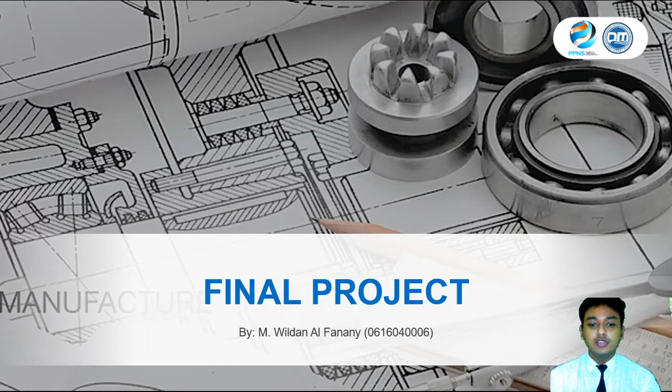Let's start the main topic: design and manufacture of turning attachment for duplicate turning process on conventional lathe machine, with my supporting lecturers, Bayu Wiro Karuniawan, STMT, and Dika Aditya Purnomo, SST, MT.

The background: Indonesia is one of the big countries with a big role in the manufacturing industry. On a national scale, the sector contributes to an increase in economy by 20.27%, by shifting the role from commodity-based to manufacturing-based, making Indonesia the biggest manufacturing base in Southeast Asia. In global manufacturing, Indonesia stands in 9th position among all nations in the world. The potential of manufacturing sector growth in Indonesia forces companies to be more productive.

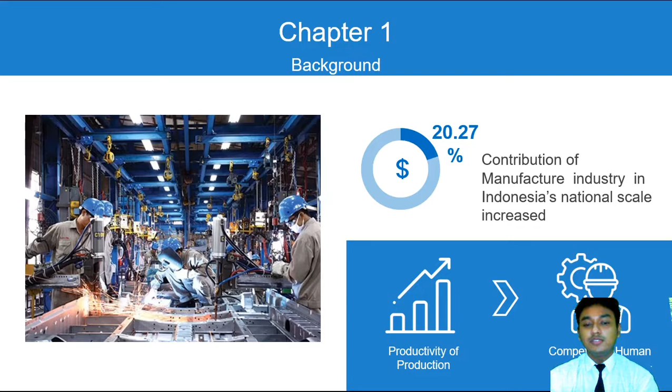One effort to increase productivity is skilled and competent manpower. Higher education institutions have an important role in creating skilled and competent human resources. Polytechnic of Shipbuilding Surabaya is an institution oriented on vocational study, committed to creating skilled and competent human resources, especially in the maritime industry and other industrial sectors.

To comply with Permenristek Dikti number 44, year 2015, about National Higher Education Standards, PPNS began to apply the teaching factory learning model. Teaching factory implements the real standards of the industrial sector to build the skill of human resources, and is expected to cooperate with industry to make commercial products.

PPNS workshop provides production facilities such as CNC lathes and conventional lathes. Conventional lathes have a lot of weaknesses compared to CNC lathes. Because of these weaknesses, the conventional lathe needs an improvement to be able to duplicate workpieces by adding an attachment to the tool post of the conventional lathe.

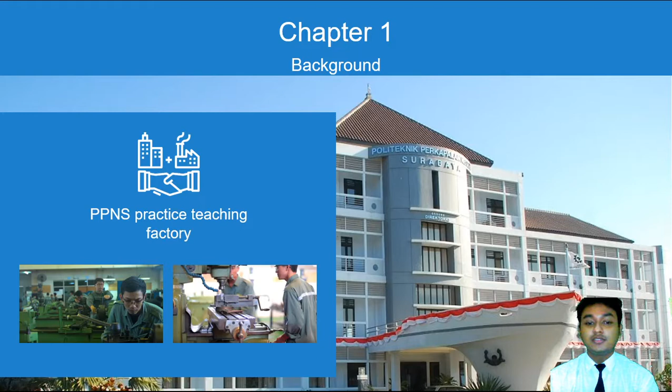From these problems, the writer made this a research topic for the final project, titled design of turning attachment for duplicating process on conventional lathes.

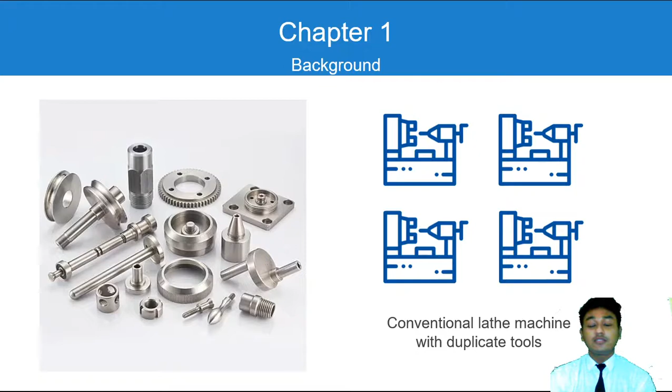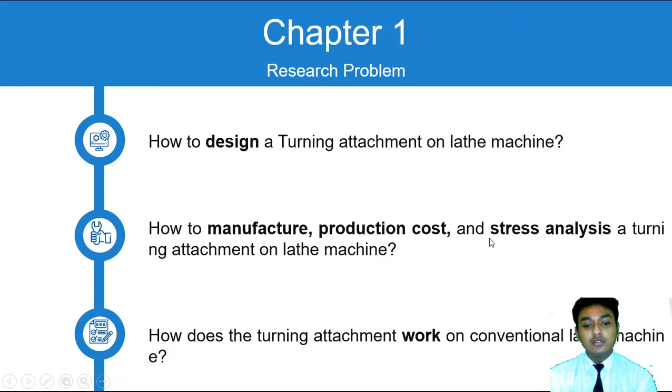Moving to the next slide, these are the research problems: how to design a turning attachment on a lathe machine, how to manufacture it, the production cost, stress analysis of the turning attachment, and how the turning attachment works on a conventional lathe machine.

The turning attachment should be mounted on a conventional lathe with brand Harrison M250, the small lathe that PPNS has. The turning attachment does not pay attention to the surface roughness of the workpiece. The maximum workpiece length is below 50 mm, and the maximum workpiece diameter is 35 mm.

Welding strength and bolt strength are considered for safety. The material used for trial testing is aluminum with HSS tools. The measurement of force using dynamometers is not discussed, and optimization of machine parameters is not discussed.

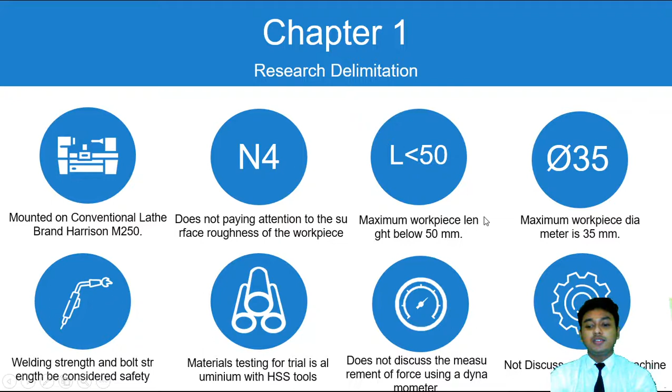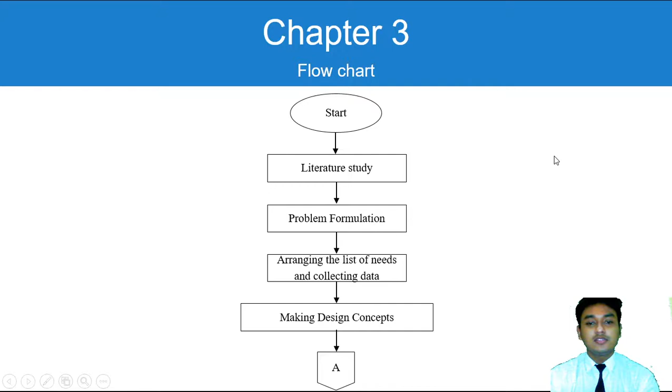This is the flowchart, using the Ulrich method for this research, by making 3 design concepts, filtering them, and trialing them.

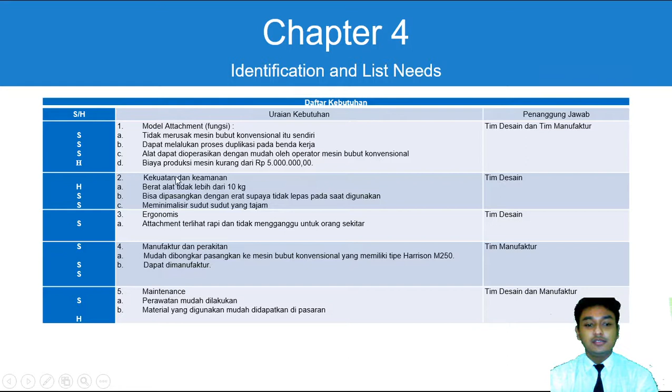This is the identification of list and needs for this model: strength, ergonomics, manufacture and assembly, and maintenance.

This is chapter 4, design concept. The first design concept is a turning attachment with a top plate with an inside spring, using pull springs.

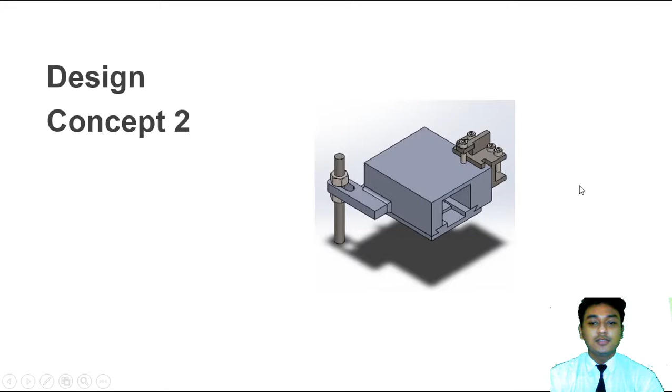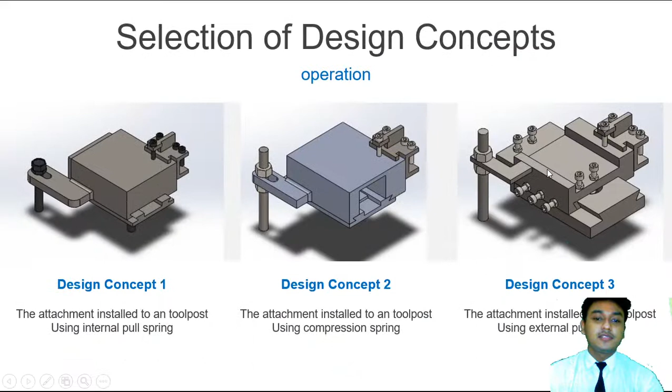Design concept 2 uses compression springs placed inside, and design concept 3 uses a pull spring placed outside. This is the section of the design concept in operation. The three design concepts work the same way, and this is the geometry.

Design concept 1 has a length of 155 millimeters, width of 135, height of 60 millimeters, and weight of 2.47 kilograms. Design concept 2 has a length of 130 millimeters, width of 125, height of 65 millimeters, and weight of 2.31 kilograms.

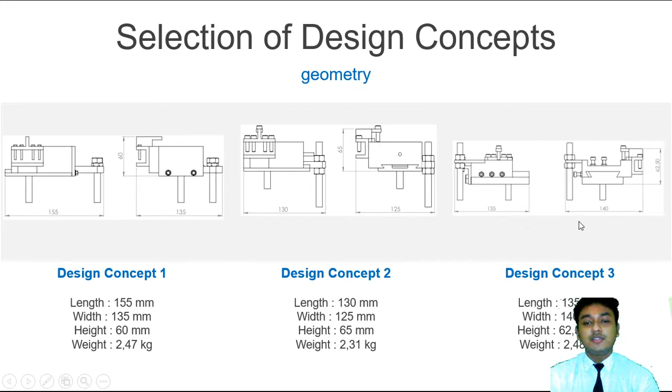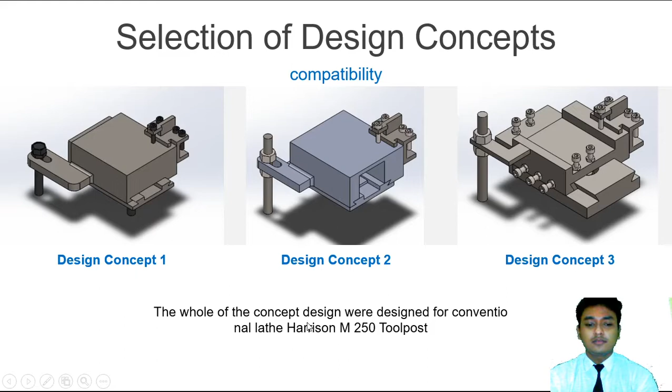Design concept 3 has a length of 135 millimeters, width of 140, height of 62.5 millimeters, and weight of 2.48 kilograms, the biggest of the three. The compatibility of the three design concepts is the same overall, since we made them for the conventional lathe Harrison M250 toolpost.

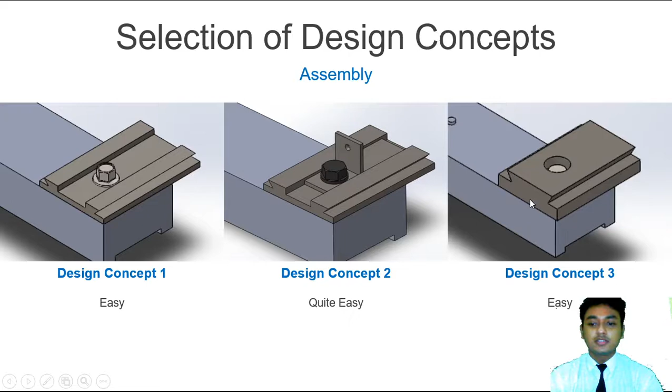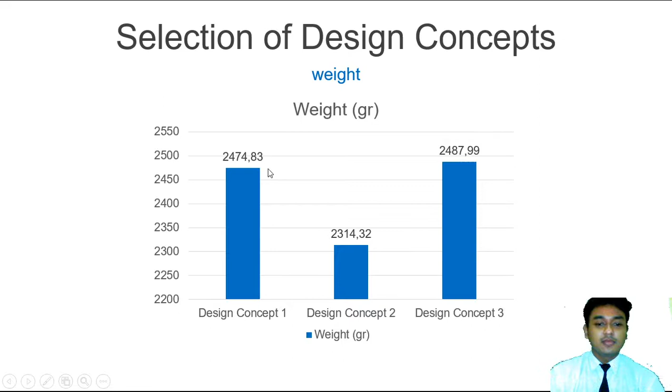And this is the weight of the 3 design concepts. Design concept 3 has more weight with 2,487.99 grams, and the lightest one is design concept 2.

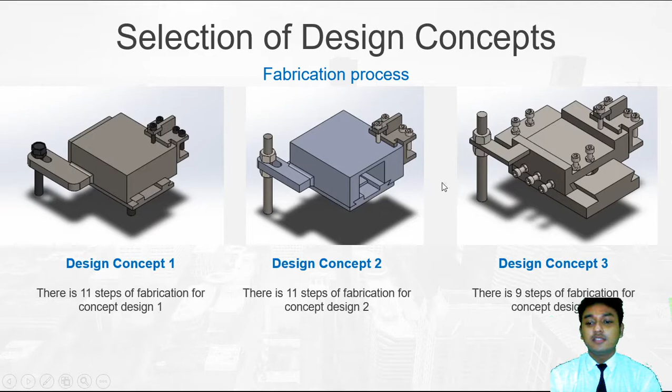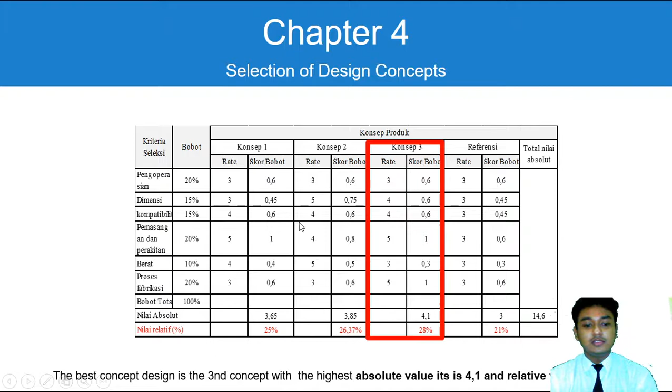The fabrication process: design concept 1 and design concept 2 have the same steps of fabrication with 11 steps, but design concept 3 just needs 9 steps, making it easier. This is the point of selection for the design concept, and concept 3 is chosen because it has the highest absolute value of 4.1 and relative value of 28%.

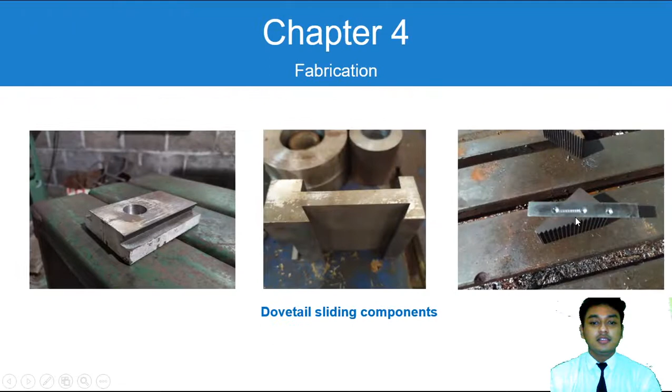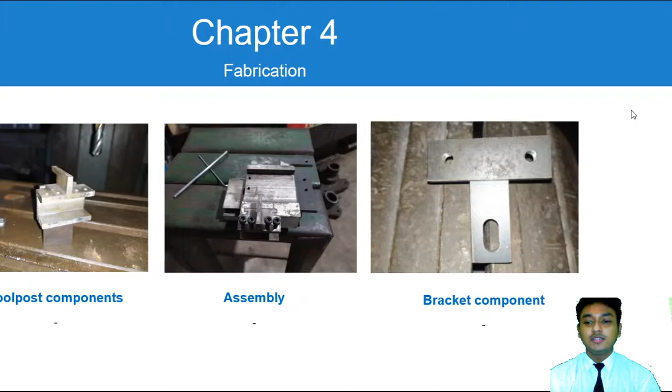And then we move on to the cost. The total cost of producing the turning attachment is 3,144,000 rupiah.

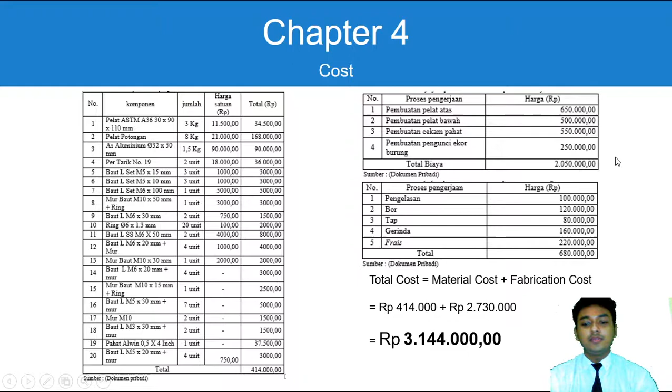And this is the mechanism. You can see there are 2 springs attached on top of the upper plate. This makes the imitator always stay on the path. So if the toolpost is moved to the right or left, the upper plate will move forwards and backwards according to the mold, because the imitator will keep going along this contour.

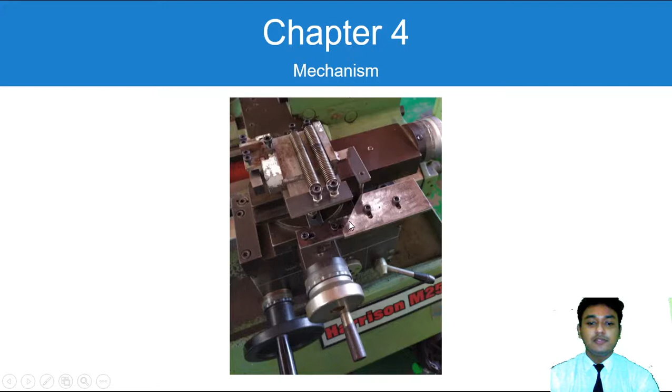Then this is a video of the assembly mechanism. You can see the mechanism a little bit at the end of the video because I made it time lapse. So we start to see this.

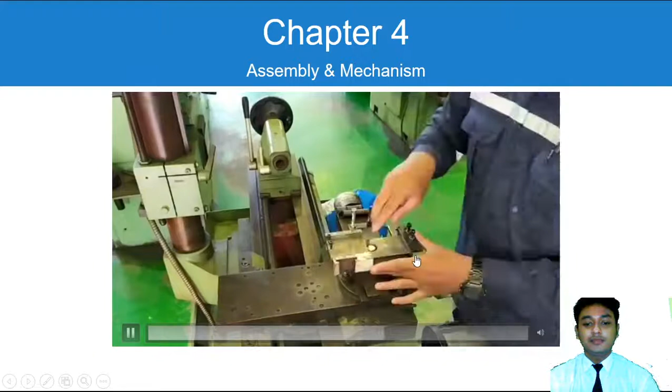The original toolpost of the turning attachment should be detached and replaced by the turning attachment. This is the mechanism, you can see that. Okay.

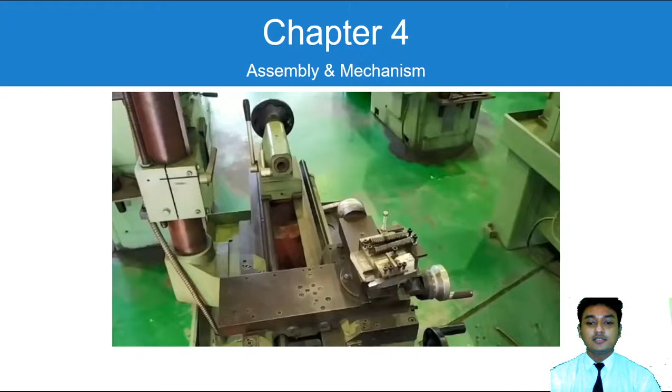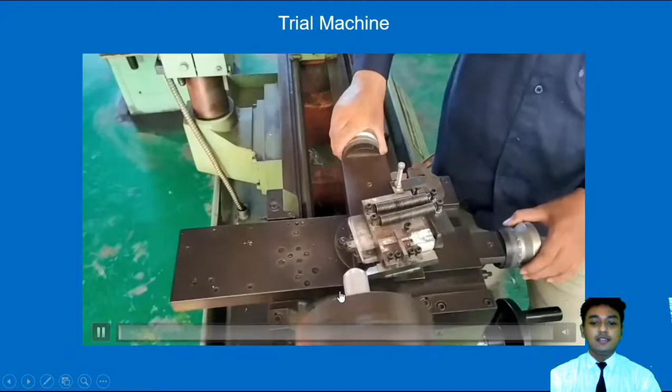And then this is the trial process. The material used is aluminum with a diameter of 31.61 millimeters, and the tool is HSS.

The process takes a full amount of time, so I sped it up, but we cut it because the limitation of time for the presentation is 15 minutes.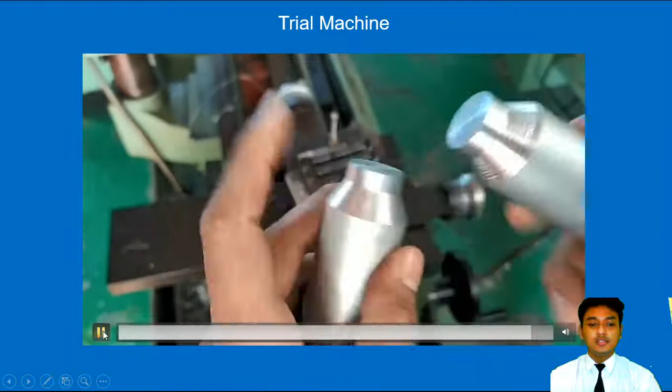This is the result. The left one is 0.2 millimeters of feeding, and the right one is 0.5 millimeters of feeding.

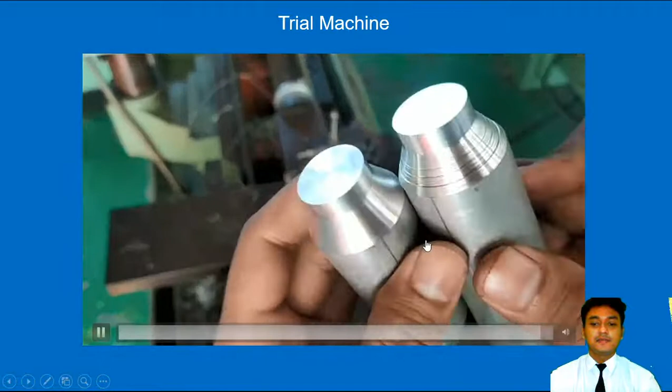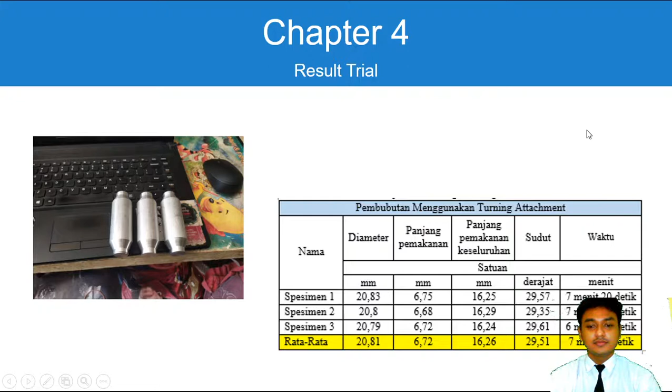Okay, then the next slide. This is the result of the trial, and the parameters are as follows: the RPM is 350 RPM with a depth of cut of 0.2 millimeters.

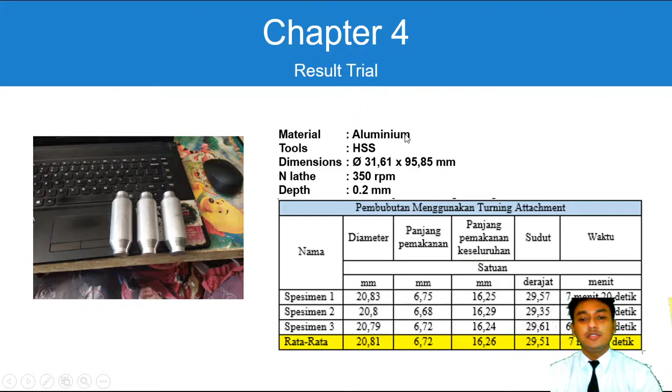And the last part is the conclusion. Design of the turning attachment using SolidWorks and AutoCAD software. Research using Ulrich's method by making 3 concepts and considering the best concept to meet the selection criteria, and for the final result, concept 3 was selected.

The fabrication process consists of marking, cutting, milling, grinding, wire cut, tapping, welding, and drilling. The total cost of our turning attachment is 3,144,000 rupiah. Stress analysis of the turning attachment determined it is safe to hold 186.3 Newtons of load, with maximum material yield strength of 250 MPa.

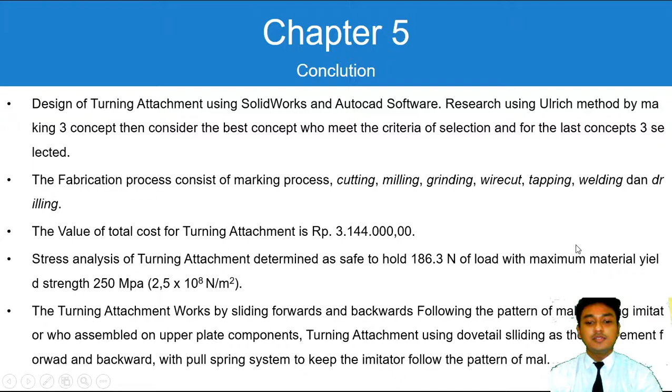The turning attachment works by sliding forwards and backwards following the pattern of the mal, using an imitator assembled on the upper plate component. The turning attachment uses dovetail sliding as its forward and backward movement, with a spring system to make the imitator follow the pattern of the mal.

Recommendations for future research: the sliding mechanism should be improved compared to this research. Evaluate and repair the dovetail sliding mechanism, because it has trouble climbing patterns over 39 degrees. The attachment should be made universal without needing to break the components of the lathe machine, and the design should be improved to make it more attractive so the turning attachment seems more familiar.